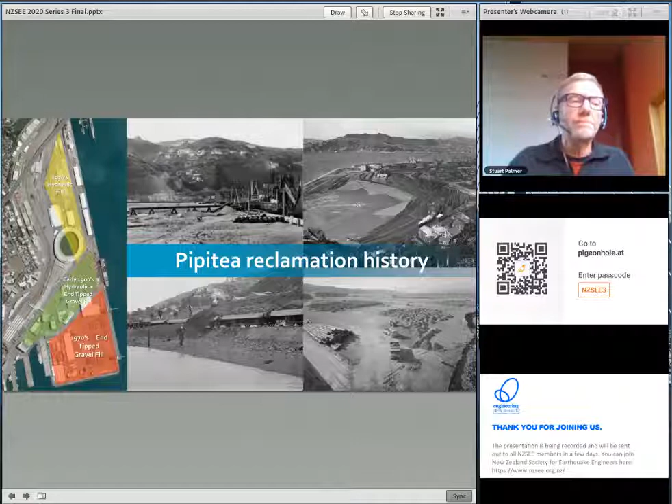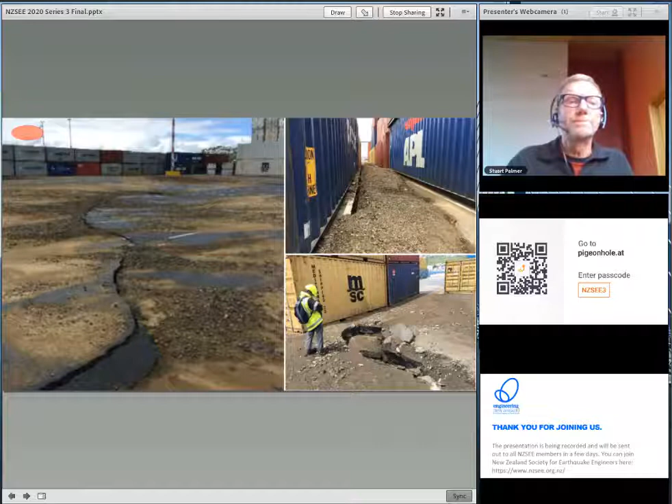Just a few images to describe what we're talking about. This is the container terminal in the south, with considerable gravel and sand ejecta, and settlement of the order of 300 millimeters. Moving further north into the log yard, the green area on the previous map, there's sand ejecta and typically 100 millimeters of settlement. Moving further north again into the Aotea area, the silty clay area, operations continued with only a limited amount of damage.

Across the port and Pipitea area, we were feeling something like 0.25 G peak ground acceleration. In contrast, in central Wellington, only about 0.15 G, and that's why we attribute the difference in land damage. Why the difference? You'll remember from the webinar a couple of weeks ago where that was explained—basically across the Pipitea port area we've got substantially greater thicknesses of sediments and proximity to the basin edge, and therefore greater amplification effects than what we saw in central Wellington.

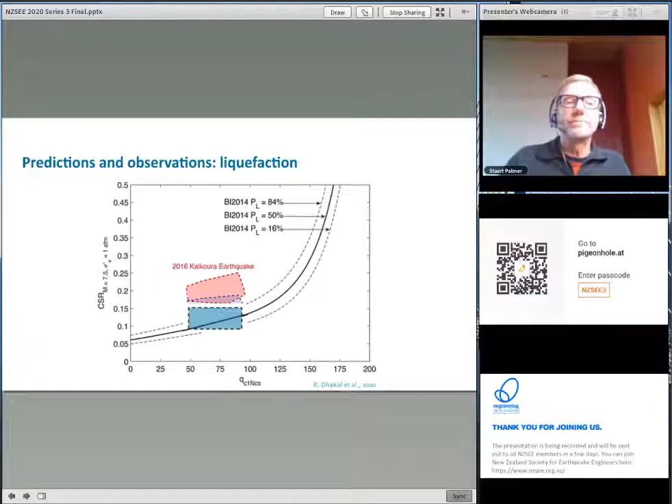So what this is indicating is that liquefaction was right on the level of trigger in this area. Groundwater level was close to the surface, and therefore it was easy to see evidence of liquefaction at this location, but other areas where the groundwater table was deeper, there was less evidence.

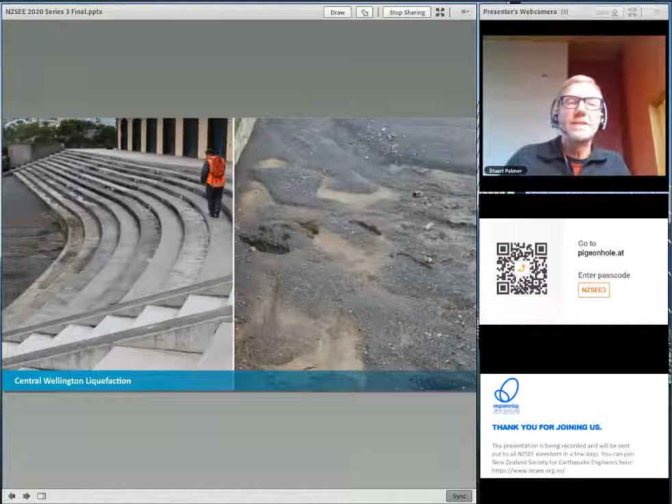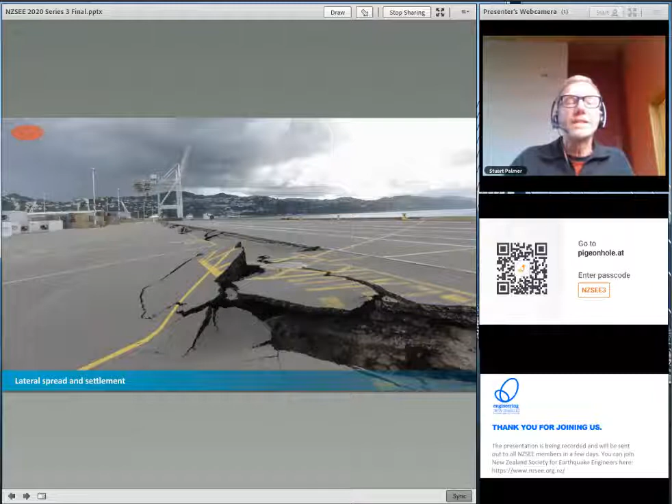A few images of the lateral spread. This is down the container terminal where we saw something like a metre of lateral spread and 300 millimetres of settlement. As we move further north towards Aotea, that lateral spread and settlement are substantially reduced.

Mentioned low damage seismic design there. Hamish will be talking more about that shortly, but there's a project being run by Engineering New Zealand at the moment promoting low damage seismic design and developing tools for us to apply it in the future.

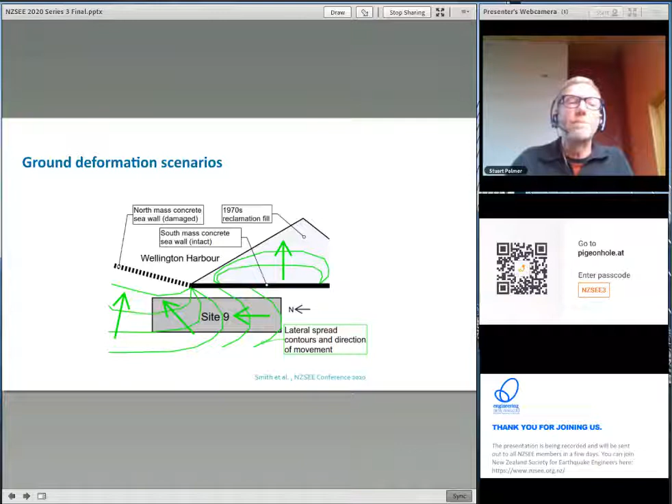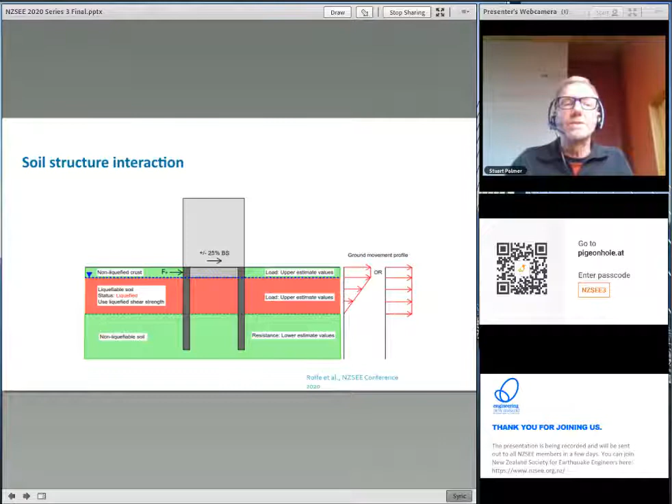And also thinking more about their load displacement behavior. So just interestingly, going back through a little bit of the history of piles in Wellington, back in the 1960s we were seeing a lot of bottom-driven, expanded base Franki piles, with a few issues around structural integrity and durability. Later on in the 1980s, we were seeing a lot of top-driven precast concrete piles, with a few question marks around the lateral load capacity of these piles and also potential damage and the effects on durability during their driving.

Later on in the 1990s, we had a number of buildings founded on top-driven temporary casings, then casing extracted and the pile cast in situ. A very effective pile - we were getting a lot of capacity out of these, and for that reason I certainly still push to try and use them. The difficulty is the noise and vibration associated with their construction, and for that reason they seem to be difficult to get across the line.

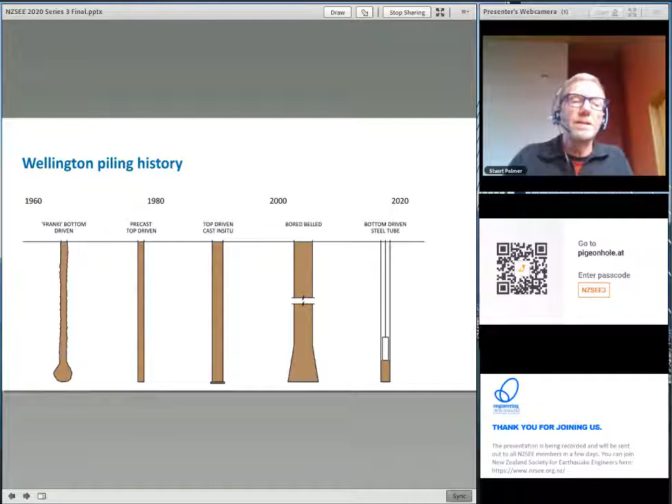A few more details around that. Two piling solutions there, both providing something like 10 meganewtons of ultimate limit state capacity. The bored belled pile, a 1200 diameter pile with a 2-meter bell, and then the driven pile, 600 diameters, four of them to provide the same capacity. The difficulty, as I said, was the bored belled pile's displacement potential, and always the risk that you're going to park it just above one of those random silt beds which we find throughout the dense gravels we're founding in, and then with a silt bed beneath, substantially more settlement potential.

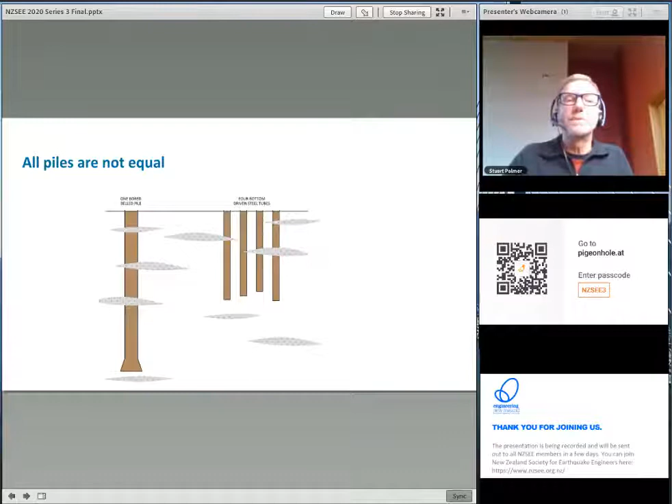That risk of settlement is reduced to some extent with the driven pile, because from the driving record you get some sort of feel of whether or not there is a silt bed directly beneath your pile.

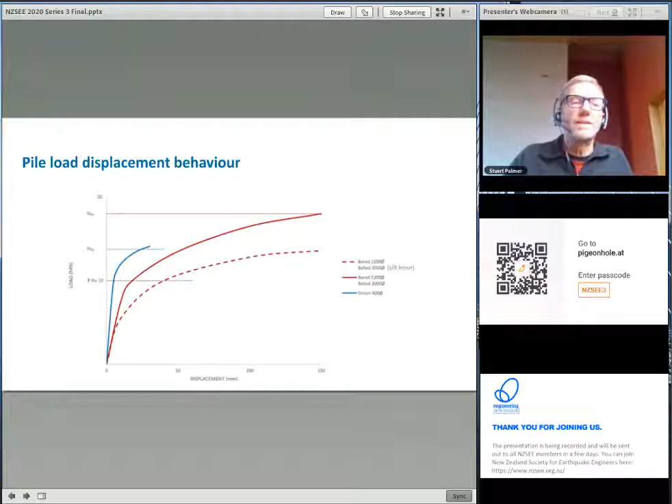Interestingly, at the same time as we're preparing these load displacement plots, we're also involved with testing of screw piles at Wellington Town Hall. Where we had screw piles founded in the dense gravels, we're getting load displacement behaviors very similar to those we've calculated for the concrete piles. And where we've purposely parked those screw piles just above a silt bed, we were seeing load displacement relationships very similar to the dashed line.

Prior to the Canterbury and Kaikoura earthquakes, it was common practice in New Zealand capacity design to design piles with strength reduction factors of 0.8 or 0.9. I would hope that's not common practice now, and the purpose of this slide is to describe why.

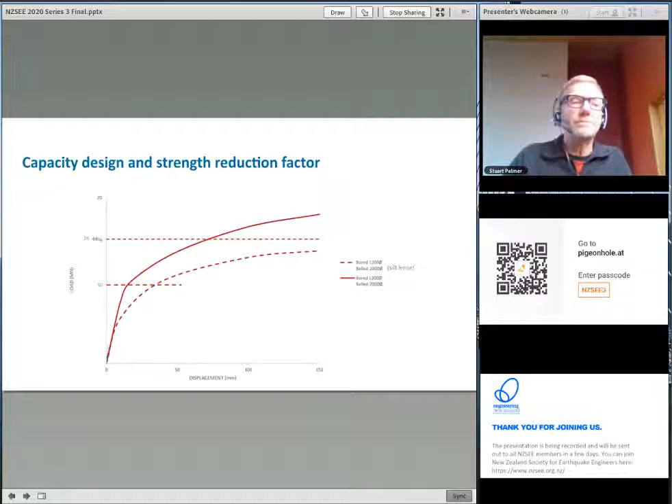Now just to counter what I've just said, here are observations from the Kaikoura event. There are three buildings we're aware of in Wellington that yielded during the earthquake and were founded on bored belled piles designed with strength reduction factors of 0.85. Those buildings yielded, so it's likely the foundations felt the full capacity design loads, and they were on belled piles, some relatively large, right up to 3.2 meters diameter.

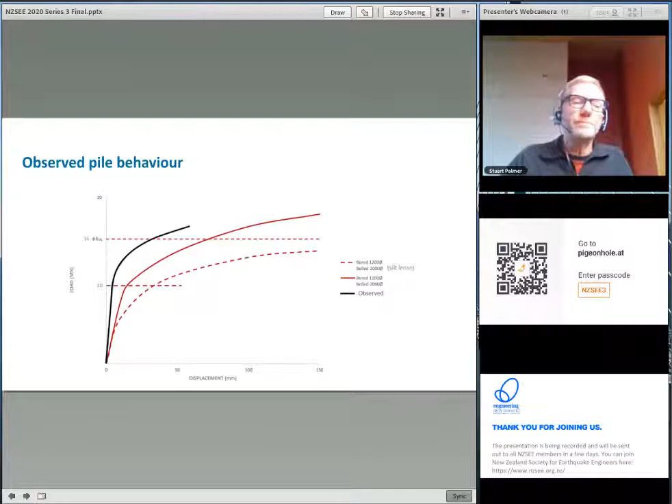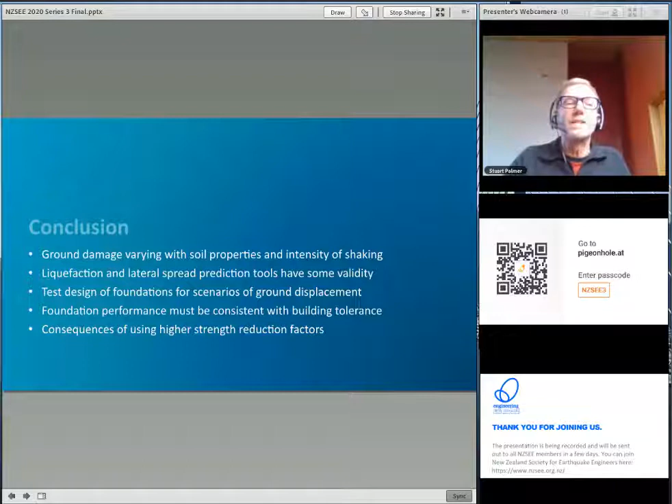Summing up: across Wellington we saw quite a lot of difference in land damage as a consequence of the Kaikoura event, but that is explained by varying soil properties and varying shaking across the central area. Our prediction tools for liquefaction and lateral spread seem to have some validity, and we should certainly continue using them in our design.

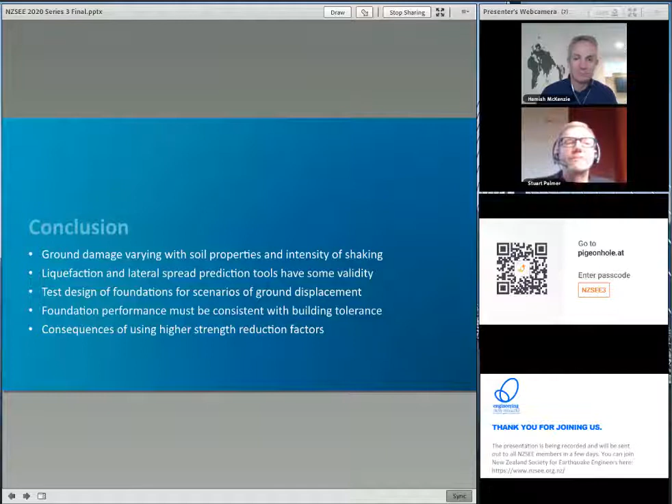Something we need to be thinking about in design is tolerance of our buildings to differential movement, and therefore what foundation systems we should be using. Finally, use of higher strength reduction factors is something to be treated with a lot of caution.

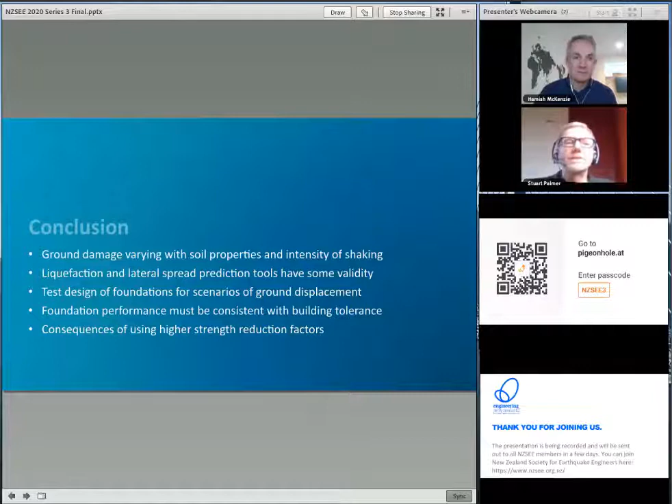I wanted to start with my initial observations after the Kaikoura earthquake happened, mid-November 2016 at midnight. I did what most people probably did at that point and got straight onto the GNS app on my phone, and pretty early realised this was a fairly large event. Thankfully it was a wee way away from the Wellington CBD, but the very fact there was a significant gap in the felt reports record made me think this probably isn't that great—it's a decent event and we're going to be busy for some time to come. I tried to go back to bed, pretty unsuccessfully, got up early the next morning, said goodbye to my wife and kids, and told them I'll probably see them somewhere around Christmas.

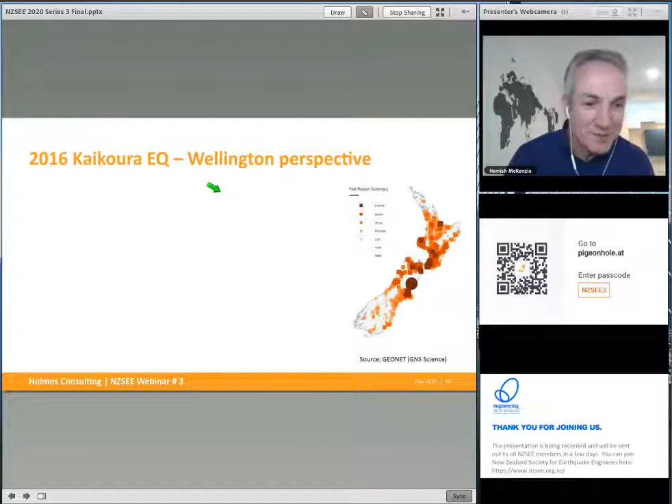We then moved into a rapid evaluation process straight after the earthquake, doing visual inspections of a vast range of buildings around the Wellington CBD and beyond. At the same time, the Kaikoura Earthquake Technical Clearinghouse process got up and running—a great initiative to bring various parties together so we could share intel and get a better understanding of what was going on around town. As Stuart alluded to, one of the first obvious observations following the earthquake was significant damage at Centreport.

A similar slide to the one Stuart showed earlier, leading to some reasonably significant damage to some of the built infrastructure at the port, both in timber and concrete wharves. That damage was mostly ground induced, so I won't cover that in more detail here. Suffice to say, there was a fairly large amount of damage at Centreport.

The other thing that became apparent reasonably early on was the fact that this earthquake seemed to affect some of the mid-rise buildings more than others around town, and it became fairly obvious reasonably soon why that was, in terms of the bump in the response spectra in that 1 to 2 second natural period range for buildings.

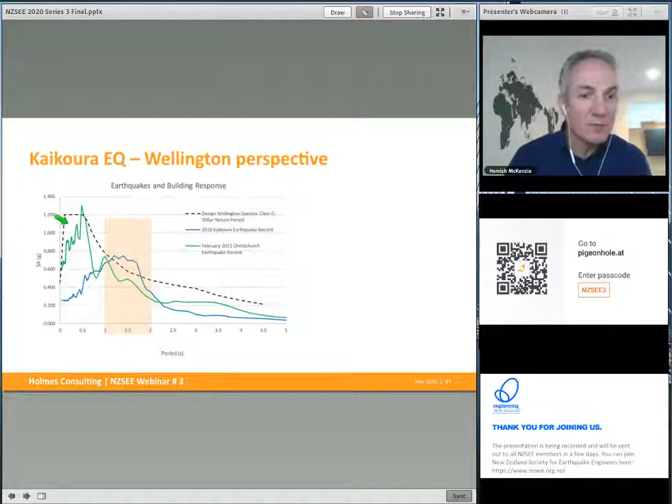I suppose that's in contrast to the Canterbury earthquake, which provided a greater response consistently over a wide range of structures, and hence more widespread damage. This Kaikoura earthquake in Wellington really did focus on those mid-rise buildings in particular.

It was also issues such as flexible concrete frame structures, buildings located on the softer soils, C and D class, and buildings with brittle or drift intolerant components, in particular precast concrete floors. And so we started looking to profile some of the buildings across town to see which ones fell into these four categories.

That was done as part of the Kaikoura Technical Clearinghouse process and an associated leadership group brought together underneath that, where we started developing the targeted damage evaluation procedures, and then profiling various buildings around town to develop the list of 80 buildings that Wellington City Council then used to seek more information on. That TDE process was very key in that regard, because it became apparent that the rapid evaluation process wasn't going far enough with some of these buildings that were suffering reasonable damage.

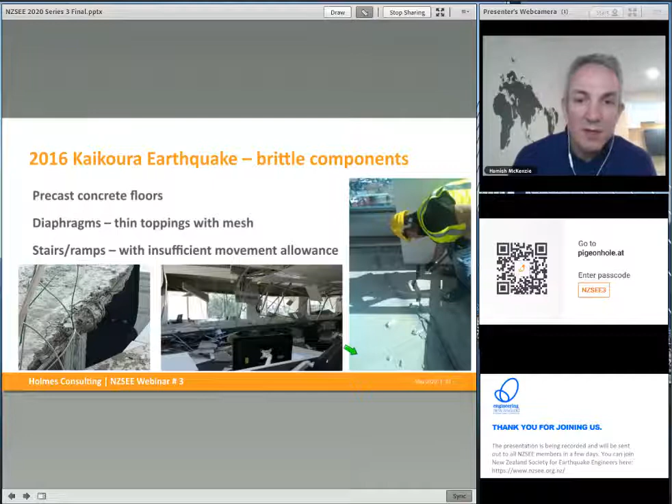Another thing that became apparent reasonably early on was the fact that not everything was completely obvious. You really did need to go looking for some of this damage.

This is a building I had a bit of knowledge of and was involved with directly, the Civic Admin building in Civic Square, where an initial rapid evaluation process certainly identified that the building had moved around a bit, some of the junctions and interfaces to the MOB building next door, and flashings had popped.

It was apparent we were grateful that the portico structure across to the library building had been removed on our advice after the Seddon earthquakes in 2013, so that was thankful that that had happened.

But it wasn't until we started lifting the raised floor and removing some ceiling linings that we really started to develop an understanding of the extent to which some of those precast floors had been damaged in this building.

From the top, some reasonably decent cracks through this floor. Here's an even bigger one where the mesh reinforcing had snapped and you could see daylight down to the floor next door. And then this is where ceiling linings had been removed to show that some of those cracks projected right through the hollow core flooring units, not just the topping.

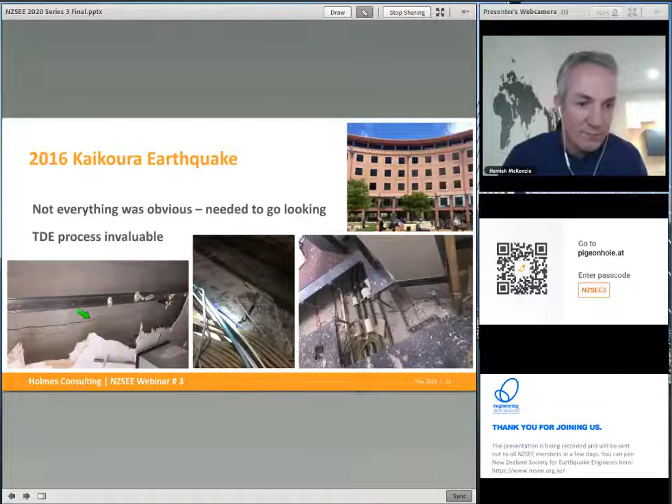On the back of that and the TDE process, there were lots of inspections, reports, repairs, and in some cases, demolition of some of these buildings on the right-hand side of the screen here.

One of the buildings on Molesworth Street was demolished pretty soon after the earthquake, others are still undergoing demolition. The photo of the BNZ on the bottom right-hand corner is one I took last week, and demolition is still underway.

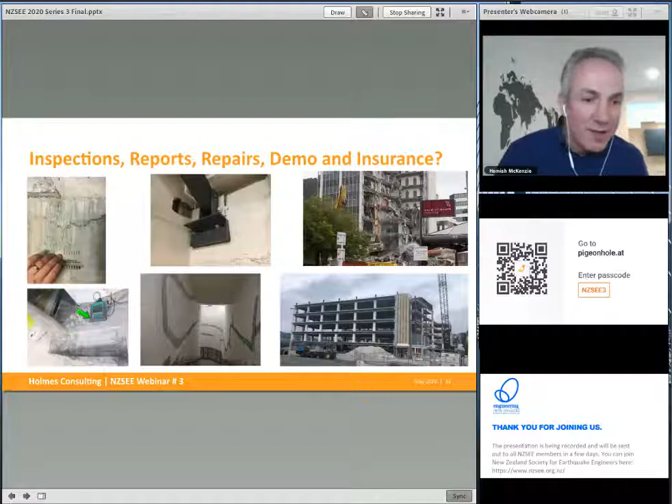And I suppose what we did find through this process, and as part of the Kaikoura earthquake in particular, was that some of the damage we were seeing in these concrete moment-resisting frame buildings with precast floors was pretty hard to repair, and that also led to the need to demolish some of these buildings.

And I suppose through all of that, a lot of the structural engineers around town were thinking, well, these buildings pretty much did what it said on the tin. They were designed for a life safety imperative. They underwent some damage. Some of them saw a reasonably decent earthquake, getting up towards and in some cases slightly above their design level. They were flexible and ductile buildings that damage would have been initiated at much lower load levels. And so the fact that they might need to be demolished at that point wasn't a particular surprise.

Albeit that wasn't necessarily a view that was widely shared. Here's a quote from Tim Grafton, the Chief Executive of the Insurance Council of New Zealand, where he says, 'New Zealand has always prided itself on the seismic resilience of its buildings, so to have lost so many new buildings shows that something is wrong with their current building standards. While they appropriately address the importance of preserving the lives of those within them during an earthquake, they do not address building resilience, the ability to withstand a big quake and still be largely functional afterwards.'

So again, as structural engineers, with an understanding of the building code life safety imperatives and what we are trying to achieve when we design new buildings, perhaps there's a mismatch of expectations here.

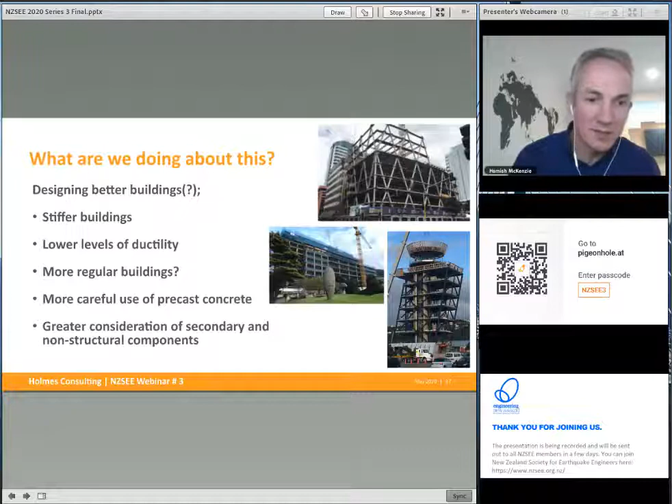I think we have been more careful about the use of precast concrete components, and the codes have become a bit more stringent in that regard as well. There has been greater consideration of secondary and non-structural components. And there's also been more uptake across various low damage seismic design technologies, whether that be base isolation using lead rubber bearings or friction pendulum sliders. There's been damping devices used in various buildings, and some of those are shown on the right hand side.

The use of yielding links, rocking and PRESSS technology, etc. I won't go into all the different low damage design techniques and methodologies, but I suppose there remains a question about whether these low damage design technologies are providing consistent and holistic outcomes for buildings, and whether there is a consistent approach to the implementation of low damage seismic design.

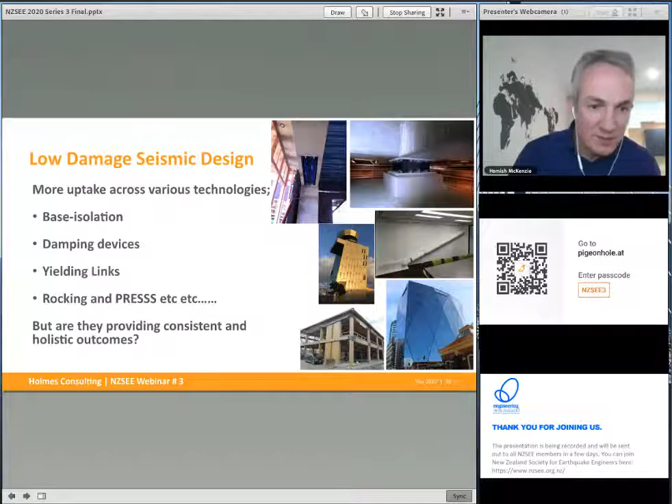Moving into some of the industry initiatives that have been ongoing in that period, there's been a lot of work around secondary and non-structural components, and that work remains important and an area that we all need to focus on - not just structural engineers, but all parts of the design and construction sector.

There's been the Parapet Strengthening Order in Council, and that's been great in achieving some improvements to some of these lower rise URM buildings throughout the wider Wellington region. And there's been talk about potentially trying to convert that into an acceptable solution for adoption around the lower North Island and some of the smaller provincial towns in the lower North Island and throughout New Zealand.

The seismic assessment guidelines have been great in achieving more consistent outcomes across our seismic assessment work. They still have a life safety imperative only, but they do provide a more holistic look at buildings, including secondary structural and non-structural components. They've been great at driving more consistent outcomes with our earthquake assessment work.

As alluded to in the previous slide, there's been ongoing debate about the C5 concrete section of the guidelines, red versus yellow chapters, and there has been an ongoing MBIE funded project run through Engineering New Zealand with technical input from SESOC and NZSEE to investigate that.

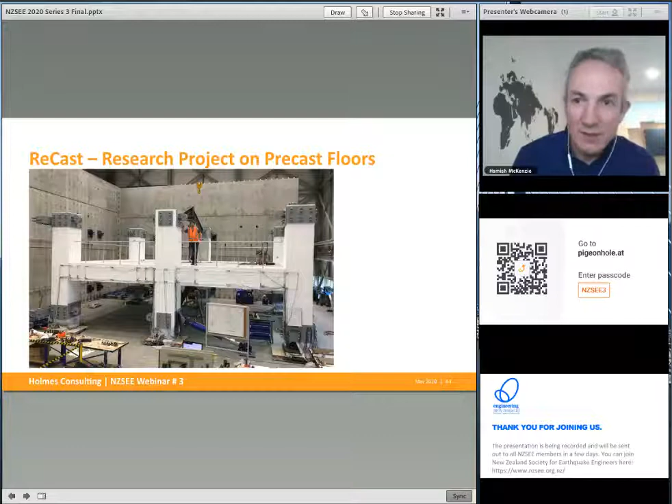Stu alluded to the low damage seismic design initiative, which Jenny Tipler also mentioned as part of her address at the first webinar. The aim of that project is to raise awareness and understanding of low damage seismic design so it's more widely used and more consistently implemented.

There's a steering group set up for that project across industry, including representatives from SESOC, NZSEE and other interested parties, and a working group with key technical input across architecture, geotechnical and structural engineering disciplines.

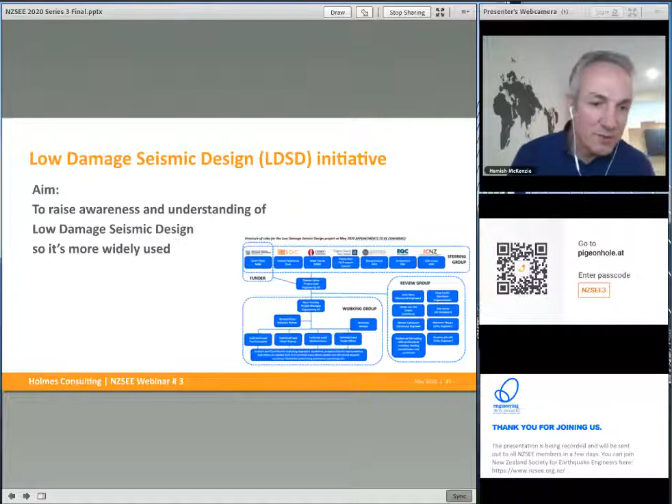That project is being split into a couple of sections, the first one being advice for building owners, tenants and users, and the first draft of that document has been prepared and is currently being reviewed. The second part of the initiative is technical advice for design teams - that work's been planned and is about to get underway.

I just wanted to touch briefly on 1170 and its status - there's perhaps been a bit of frustration for a while that Amendment 1 hasn't been cited and Amendment 2 has been stalled, and so on the back of that, SESOC issued some input to our members as part of our newsletter back late last year.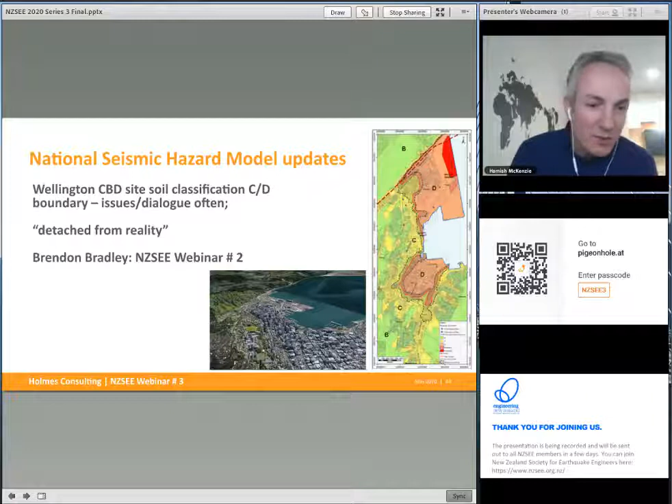Finally, just wanted to make a mention of the Seismic Risk Working Group, which is a project that's underway with MBIE, looking at the longer term future of earthquake risk design policy and processes. Again, that was something Jenny Tipler touched on in her address from webinar 1.

And just for conclusions, look, we operate within a very complex system, and I think it's worth reflecting on that at times and just understanding that there's a lot we don't know and a lot we're still learning. We certainly are continuing to learn, and these earthquake events are a good process in which to do that. Change is inevitable, and we should embrace that and bring our clients and partners along for that ride, making them aware that this is an industry where we continue to learn, and change will occur over time.

There are some great initiatives happening within our industry, and I think it's incumbent on all of us to keep abreast of those initiatives. Keep being curious, keep understanding what's going on so that we can all keep current and up to date. And also just highlighting the fact that we are making progress.

There are some really good things happening in the industry, so let's celebrate those successes and tell these stories. I'd like to congratulate NZSEE for this webinar series, because I think that's a really good initiative to help tell these stories and celebrate some of those successes. Thank you, and I'll hand over to Richard.

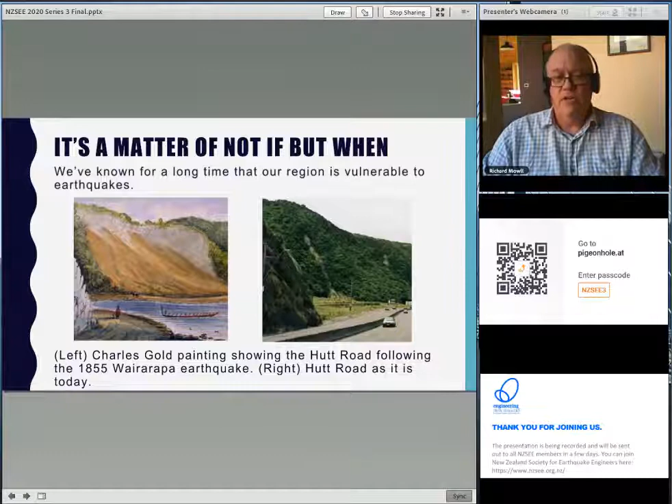Recognising that, back in 2016 there was discussion on how we could mitigate some of the risk. As the Lifelines group, we had run projects in the past which did look at interdependencies and did come up with expert opinion on potential outages, lengths and periods of outage of infrastructure from a large quake. It turns out those expert opinions were actually pretty good on the whole. However, we wanted a forward-looking project which would look at what can we do about this. While we were formulating this plan, the Kaikoura Earthquake struck, and we rather accelerated the program to get into it.

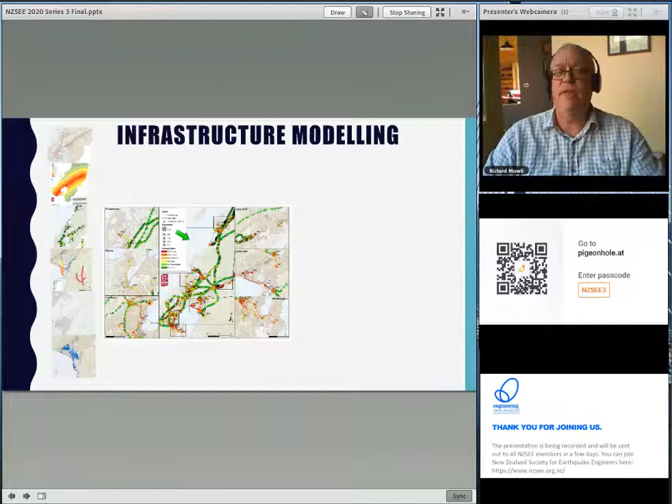We also know a lot about our infrastructure. So this is one example picked out of the report - this is the electricity network. Knowing the assets, as we do from GIS mappings from the utility, Lifeline utilities, match those against the hazard models and use fragility curves, we can model again with reasonable knowledge likely damage from a rupture of the Wellington fault.

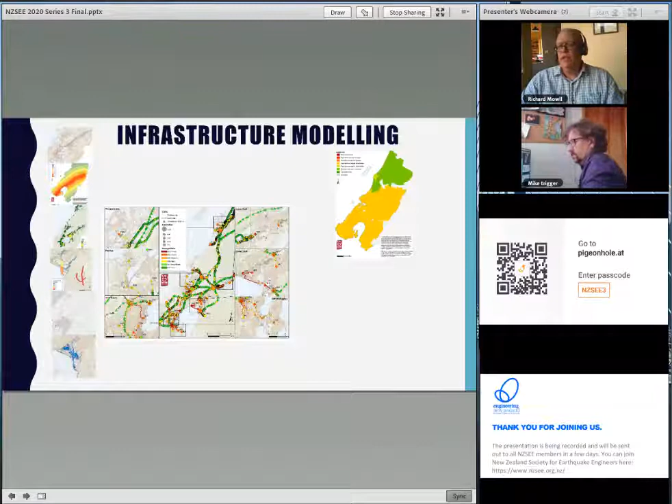Knowing the damage and knowing broadly how many crews might be available, what resources would be available to repair, and knowing again the interdependencies, which roads would be open first, the accessibility of various suburbs or areas or bits of infrastructure, we can therefore model likely outages of individual utilities. So what we see here on the right is an outage map for the electricity from the base case from the existing infrastructure.

Now, what we can also do, or as GNS did, is change the model - we can change electricity cables, change water mains, build new water mains, build new roads, and put those back into the model, then model what damage and what outages we would anticipate from that infrastructure. And that basically is the foundation on which the rest of the project ran.

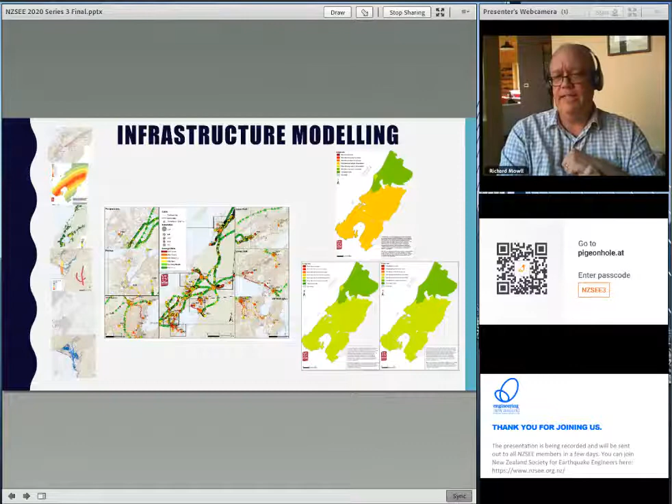From this modelling, we could work out not just our present vulnerability, but also what outages we would get if we ran various projects. And that's what basically led to the selection of various projects - there's just one example, as I outlined in the first quarter of the project, the program business case aspect of the report. So various projects were first long-listed, short-listed, and then chosen. The 25, 30 projects went through all the good stuff you do in program business cases - problem, benefits, investment objectives - and came out with the program.

Now, that only counts the economic impact. That doesn't count that less infrastructure would be damaged, broken, and would require repair. It doesn't count the co-benefits of the various projects, such as a new road having traffic safety and other benefits. A number of the projects have other benefits, none of which we counted. This $5.3 billion cost and $6 billion lessened impact only refers to the resilience benefit of the infrastructure.